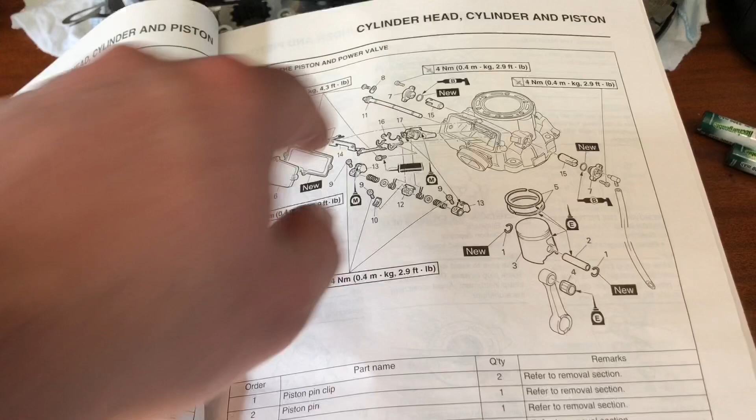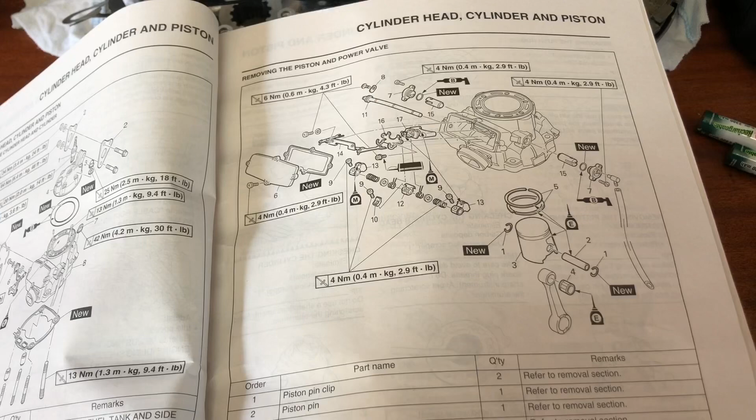So what we have here in this book is what the power valve system looks like. But the actual power valves are those two little thingamabobs in there. This is not the graph we want to look at though - usually all the pictures and graphs that come up on that mod we're talking about are actually on a different page.

Now this here is the reason why it's called the power valve mod, or sometimes the governor mod. It's the same thing - these aren't the same things, but the mod is referring to the same modification. This is the governor. It says YPVS governor - it's a Yamaha power valve system governor. And this is where the actual...

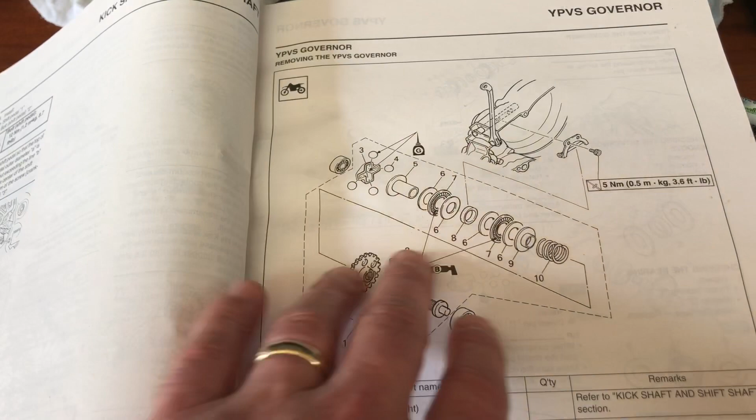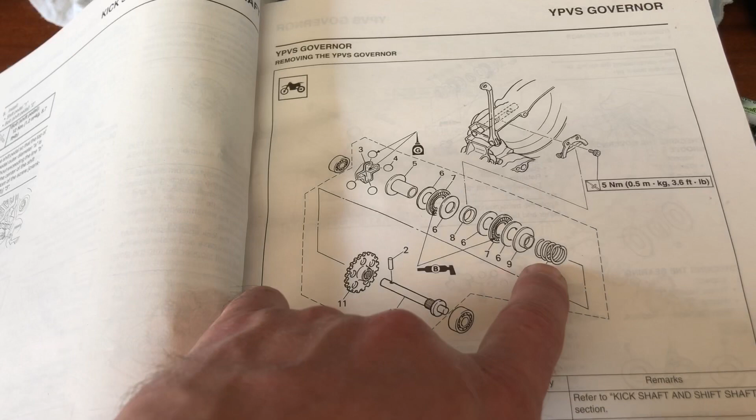...mod is going to take place. It's a very simple mod, but I couldn't find a single person that made a video or showed it, so here I am. I've learned a lot of things from YouTube, so I'm just going to pay it forward a little bit. But right there, that spring determines the tension, obviously.

And as far as I understand it now, the less tension on the spring, the earlier your power band kicks in, or I think you get a little bit more bottom end and a little bit less of a snap, a little bit less of an intense power band. Now what we're going to do is lessen the tension on this spring over here.

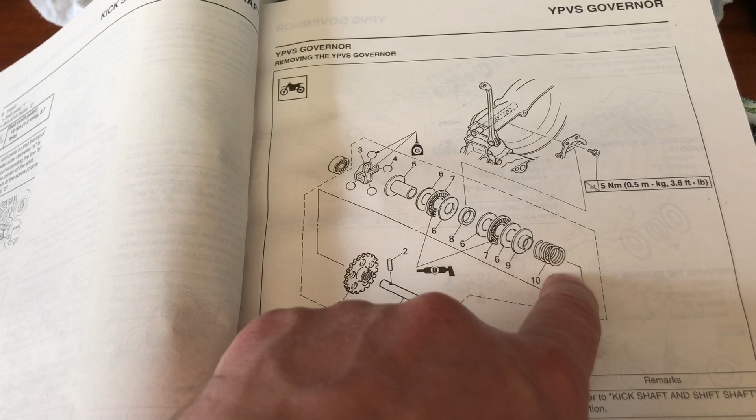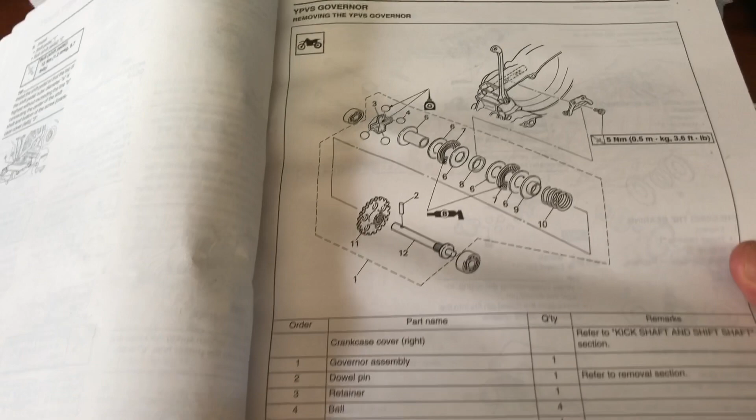Now you see you have a thrust bearing over here - number 7 says thrust bearing. Oh, you can't see that. There's your thrust bearing. Now the thrust bearing has two washers that run against it, but you'll see there's a collar as well.

Now the collar is exactly the same size as the thrust bearing, so you can actually theoretically remove number 6, the washer, and it will thrust against this collar, and that means that tiny amount you've removed puts less tension on the spring, and that'll affect your power band. I've read about a lot of people that did it, and apparently it makes a big difference. So we'll see - it's an easy enough mod to do.

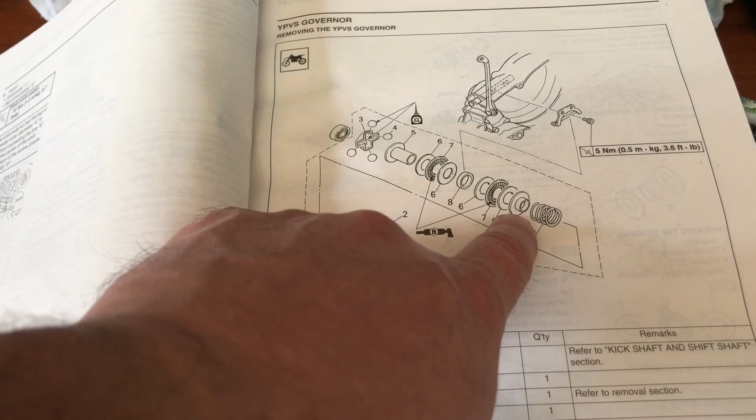Now your bike doesn't generally look like this on the side unless you've done quite a bit of stripping, but I thought that the power valve modification was going to take place in this initial place I showed you in the cylinder head, but it's not. It's actually on the right side crankcase - the governor sits inside this part of the casing here.

So your clutch is supposed to be in there, and that's your kickstarter that's supposed to be in there. This is pretty much what your right side crankcase looks like from the side, with where you put your oil in. Now you can see this little actuator arm coming out of the governor system here - that actually links up to the actuator in the head with the actual power valves. So let's turn this thing around here.

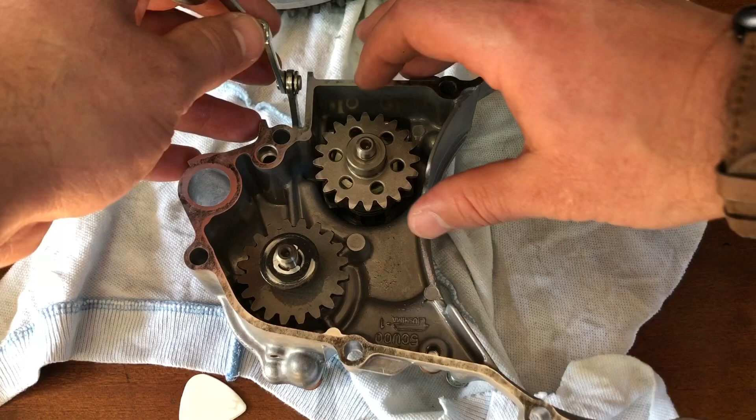Alright, and inside we have our governor, our YPVS governor - Yamaha power valve system governor. Now what we're going to do is actuate this arm a little bit, so it allows this governor to come out. So I'm going to push it out a little bit and then just shimmy it out. Don't use any force. Alright, you saw what I did there - see that?

What I did is I pulled it back and it grooves, it slots in here. And when you pull it up like that, it actually pulls this thing up, and then it gives it enough space to actually just shimmy out.

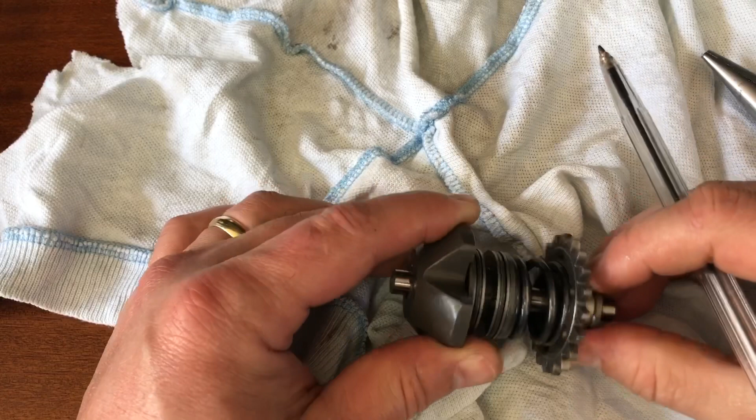Alright, so now we have the governor here, and you'll see that we have two thrust bearings. This is a thrust bearing, that is a thrust bearing there, and it's got a collar, washer, thrust bearing, washer, washer, thrust bearing, washer, collar, spring.

So we need to get this out. Now it's a little bit funny, the way they show it in the book. Let me get the book quickly. Take a look at this ninja.

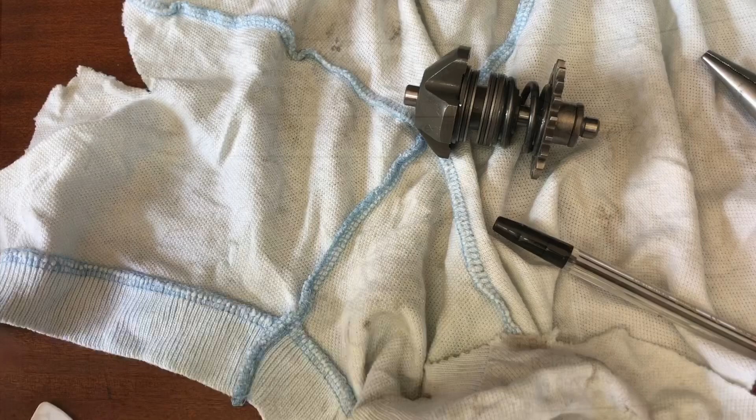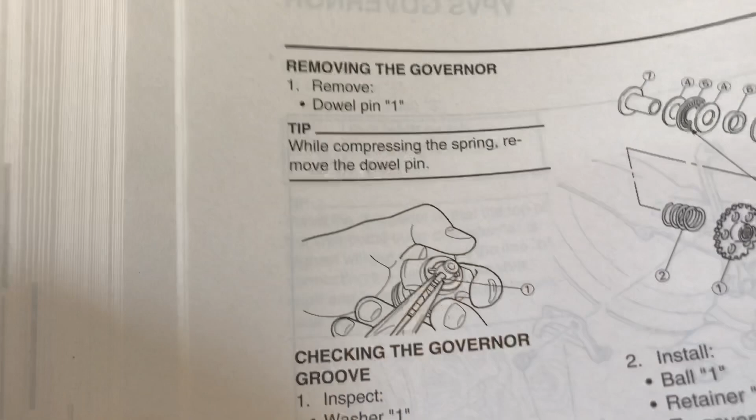He one-hands it. He compresses that spring with one hand, and with the other takes a pin out with the long nose, or needle nose pliers. I'm not capable of doing that. I have fairly strong hands. I can't do it. So I'm going to show you a different technique that worked for me.

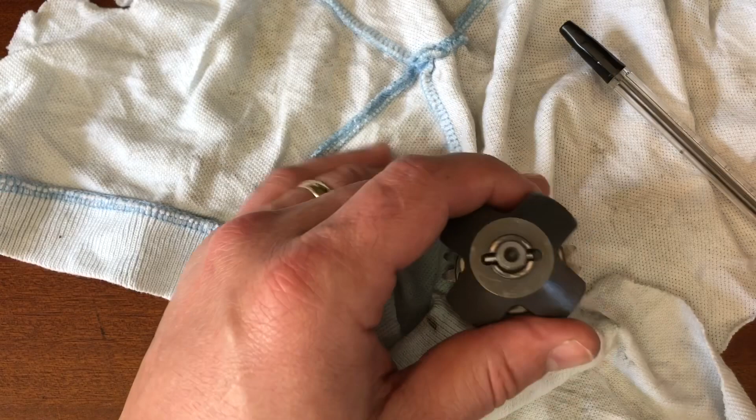To make a correction, that wasn't a ninja, that was a samurai, because they're Japanese, not Chinese. Anyway, so that guy just takes the thing like that, compresses it, and pulls it out with the needle nose pliers. Now you can do it, but...

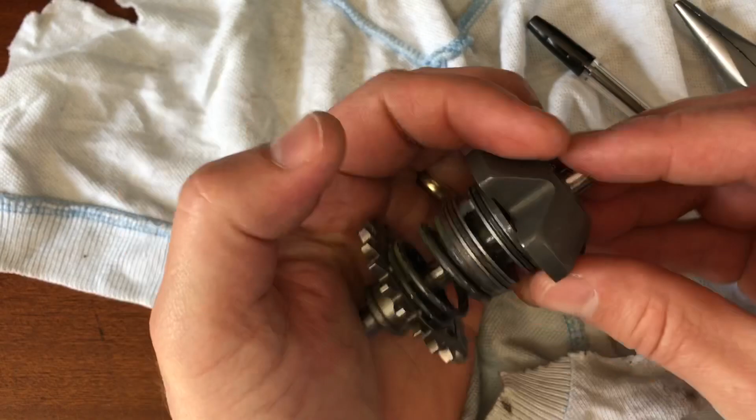Actually, let's show both ways. Let's see if I've got enough strength left. Let's use a rag and then compress it and see if we can do it. All right, here we go.

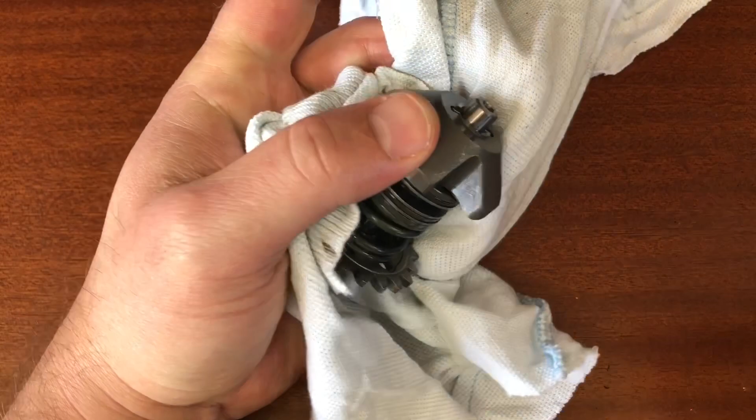Oh my, that is uncomfortable. I kind of see it as a challenge now. All right, here we go. You can do it. These small hands of mine are not really helping either. Okay, let's go, let's go. No, I'm gonna hurt something. I don't want to end up damaging something.

So here we go. What I'm going to do is take the palm part of my hand. Be careful, because when you push down and come back up, this little part of your skin gets caught there, it's going to eat it. Also, you don't want to damage your table. Ooh, I see I've already done that.

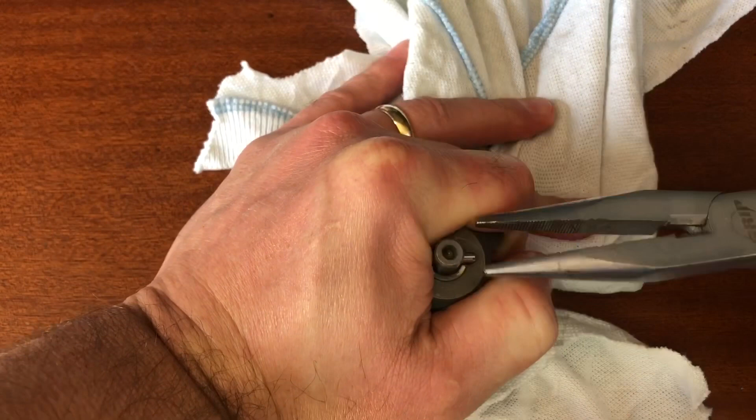So just collect some rag underneath it, so that you have a little bit of a buffer, and then you take it like that, push it down with a little bit of your body weight, and then you can pull it out. There we go. See, a lot easier. Well, relatively speaking, easier. Now this thing falls apart like a cheap suit.

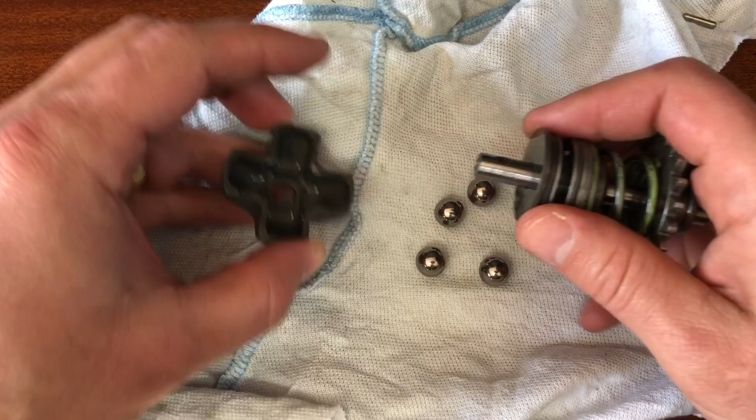Let's get some more rag going over here. So don't be scared if it falls apart. You can just refer back to the manual, or I'll walk you through it. But just take it apart carefully. Let those little ball bearings fall out, or balls, or whatever you want to call them.

So now we have this little shaft here, and I'm just going to take it apart like that. Actually, I'm going to take it apart all the way up to this. Now you see this little bearing here? It's a thrust bearing. This washer runs against it.

This is the one that we're going to be removing. And this is the thickness that makes all the difference, according to everybody on the internet that's done this modification.

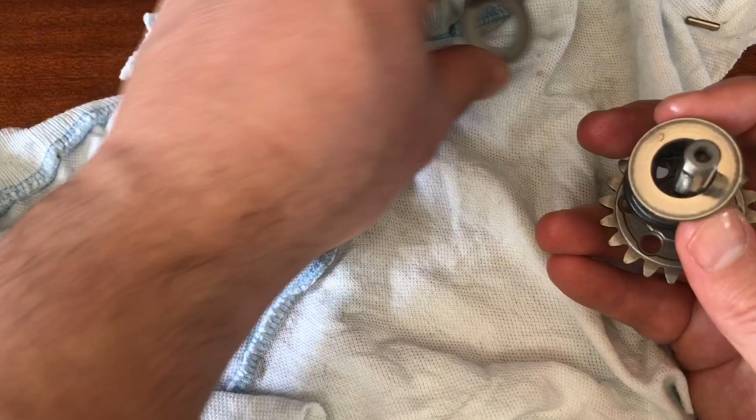So now you'll see that the collar has the same surface area as the washer. So in theory, the collar will work just as well against the thrust bearing. Not 100% happy with it, but I doubt it will make or do too much damage, I suppose, or maybe even any at all. So just put the whole thing back together again, and you must make sure that you have collar...

Thrust, let's use the pen: collar, thrust bearing, washer, washer, thrust bearing, washer, collar. And then we're going to put this thing back again. Let's put these little steel balls back in.

Now when you flip it over to put it on there, the balls are going to fall out, so hold these things in place, otherwise they're going to fall out, and just push it down like that into the hole, flip it over, and we are ready to insert our pin again using the same technique the other way around.

So now I kind of push it down to find that hole there. I just want to see, okay, I can see the hole is about there, so I just need to line it up with this. And then I'm going to do the same thing in reverse.

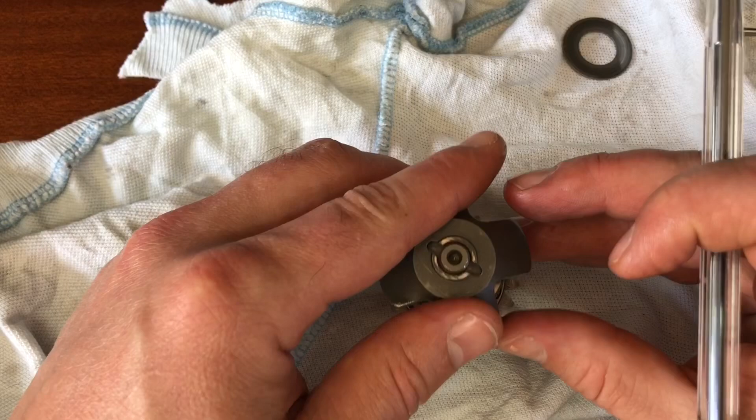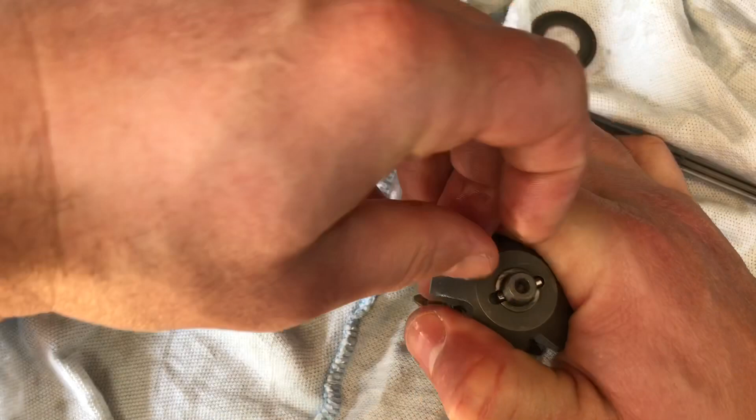I'm going to take it, it should be okay with the fingers. I'm going to push it down, line it up, push it down, get the pin in. There we go. Oops, a little bit far. Don't force anything. Oh man, now my OCD wants me to center it. Okay, there we go.

And there it is. Now we're going to put it back. Now usually the goal when you take a bike apart is to put it back together again without having extra bits, but the whole point of this exercise is to end up with this bit extra for that governor modification, or the power valve modification.

Alright, so now we need to put this back. So what we're going to do is raise this up so that it will catch this groove over here. We're going to gently insert it into that groove and put the whole thing back nice and smooth. There we go, shimmies in nice and easy, and make sure it turns freely. And there you have it. Bob's your uncle.